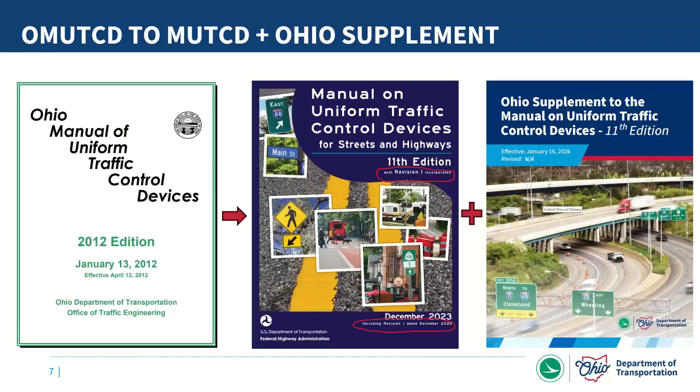Also want to make sure everyone is aware, recently the national manual had a revision that was released, just a little over a month ago, back in early March. With this new model, it's really important that users keep up to date on both our Ohio Supplement and the national MUTCD, since both documents are used together. As you have needs to check out things in our OMUTCD, just make sure you're pulling up the latest version of the national manual, and in this case, it's now revision 1.

So this slide, again, this is a review for folks who have been on the previous sessions, but I feel it's important to keep reiterating the different parts and what's covered, and how we broke this up for our training in these different LTAP sessions. Part 1 we covered in session 1, and that's the general foundational piece of the MUTCD document and our Ohio Supplement. It gets into a lot of the definitions and the legal authority and so forth.

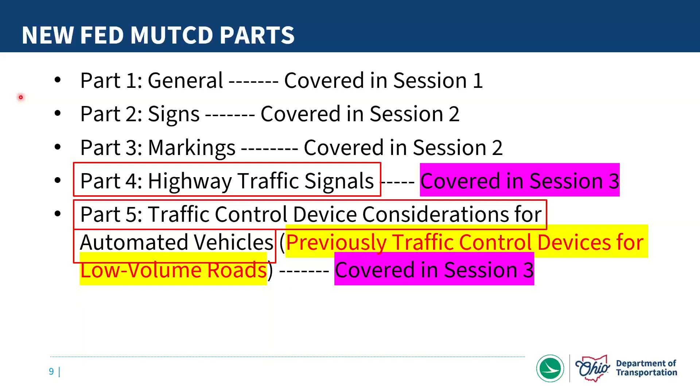Moving on, part 6 of the manual gets into temporary traffic control devices, and we've got a session that's going to solely cover that part - that's our next session, coming up in a couple weeks. Part 7 gets into traffic controls for school areas, and part 7 along with part 9 is going to be covered in our 5th session. Part 9 gets into bicycle facilities. As far as today's session, we're also going to be covering traffic control related to railroad and light rail grade crossings. So that's an overview of what we're getting into today, and a look back and look ahead at what our sessions are going to cover.

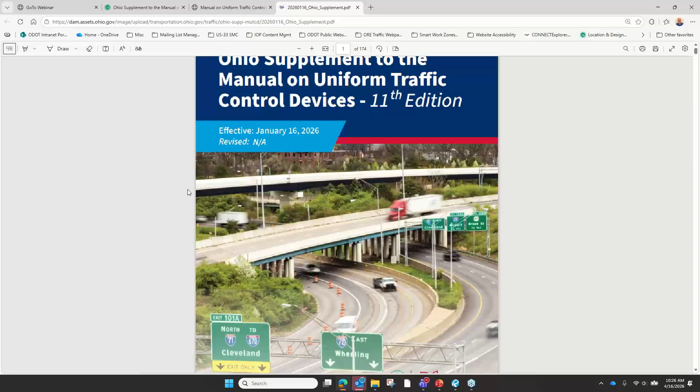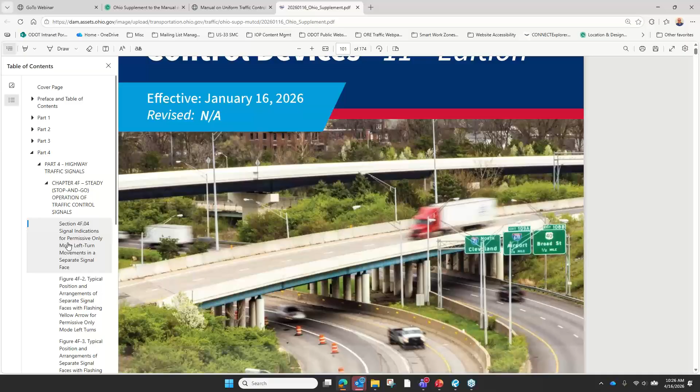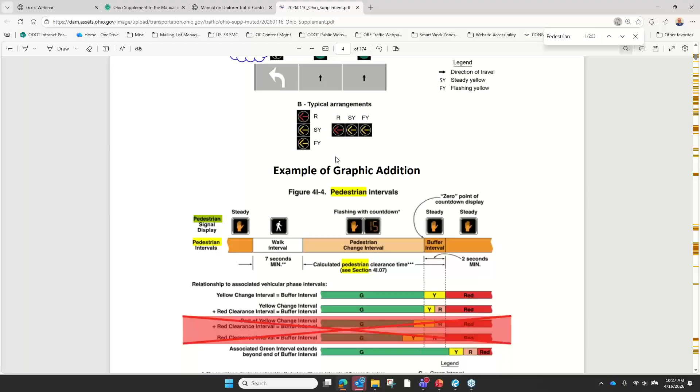Just to zoom in a little bit here, but again, to emphasize, all the information is bookmarked. You can just expand that and jump to a particular section, say in section 4, everything's bookmarked. Also, if you do the search feature, Control F, I'm in the browser, but if you download it to Acrobat or another PDF reader, Control F seems to be pretty universal, but check your particular software for the search features. You can type in search terms, so I plugged in 'pedestrian' there, and the reason I wanted to do that is to illustrate how we specifically set this up so that the text within the different graphics would also be searchable.

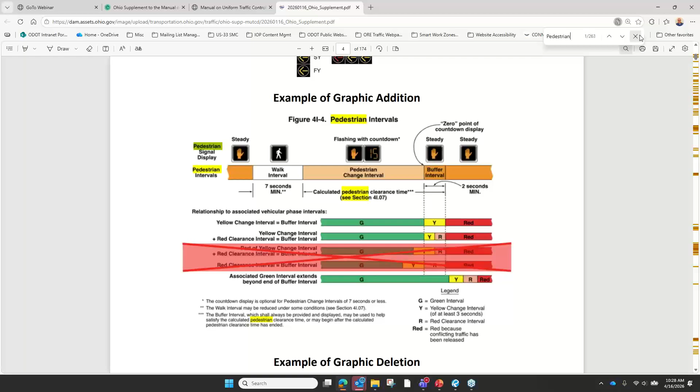If you look at the same graphic in the national MUTCD, unfortunately, if you search for pedestrian, a lot of the text indicating pedestrian isn't searchable as of yet. That's some feedback we've provided to our colleagues at FHWA, but hopefully that will be updated in the future on the national side. But at least on the Ohio Supplement, we've added that in so you should be able to search for and get hits both within the text content and the figures. I just wanted to point that out as well.

Before we jump into the main content for this session, I wanted to do a quick review, going back into part 1, to talk about compliance of devices. This is a really important topic because the MUTCD lays out a handful of traffic control devices that have specific timeframes tied to them, but the vast majority of updates and changes to traffic control devices are not tied to any specific compliance date. So I wanted to bring up this.

FHWA has set up a MUTCD FAQ page that has some frequently asked questions, and one of them gets into this: if there is no compliance date for a new requirement, when do those devices have to be upgraded to meet the requirements? What I highlighted here on the slide, I'll paraphrase, is basically that any traffic control devices may stay out in the field throughout their serviceable life. They would just need to be replaced or updated when you were at the end of the serviceable life, or if you had a project going through there, or other scheduled maintenance — that would be the timeframe you'd have to go replace traffic control devices that are not specifically listed as a target compliance requirement. Here's a hyperlink that takes you to that particular FAQ page. There are several other question answers in there that have some pretty good information for folks as well, so I definitely encourage you to check those out.

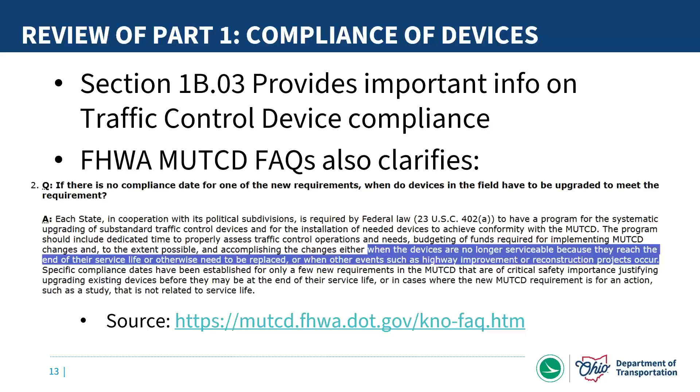So you've got weight limit signs for your structures. We talked about that in session 2. Also in session 2, we talked about low clearance signage for structures. There's a couple items here related to that. We also talked about maintaining that minimum retroreflectivity with our pavement markings. And then in our session today, there's a couple of target compliance dates associated with some of the rail grade items in the MUTCD. So we're going to take a little deeper dive on those today.

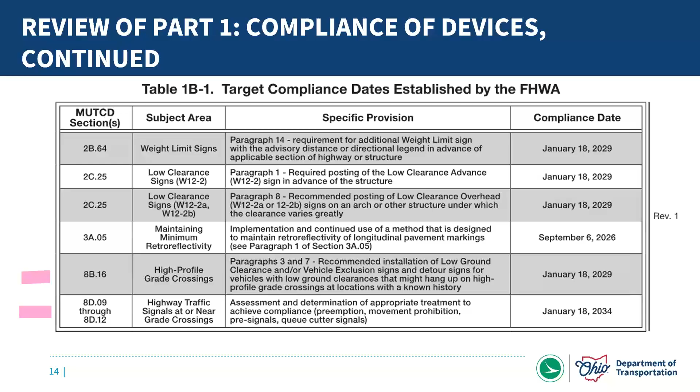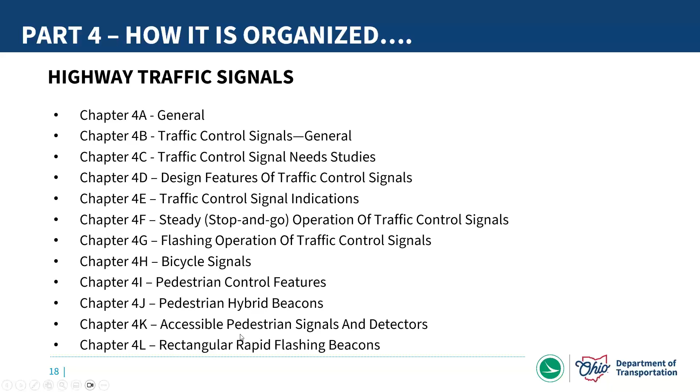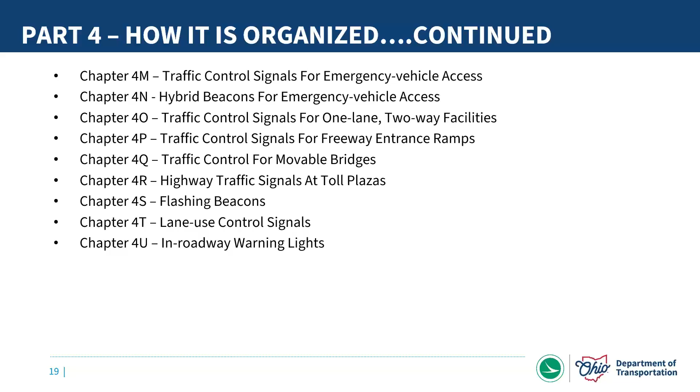The next slide is just a continuation, because part 4 does have quite a few chapters, getting into all the different aspects of highway traffic signals. So just a quick look at the additional chapters that make up part 4.

To change things up a little bit from the previous sessions, in part 4 here, what we did with the slides is we wanted to emphasize all of the things that were within our Ohio Supplement. So we're going to take a look at the specific things in our Ohio Supplement first, and then we've got some slides later on that touch on some of the changes between old and new that maybe aren't necessarily within our Ohio Supplement document, but are important also to be aware of.

So the first section wanted to mention here is sections 4F.04 and 4F.08. This gets into our flashing arrow sign use. Our Ohio Supplement, and this is something we had in the previous manual related to our flashing yellow, had some information about the installation of these signs when these types of signal installations are happening. So this is not new from the previous manual, but it is something we added again with our Ohio Supplement just to make sure there was emphasis on the addition of these signs.

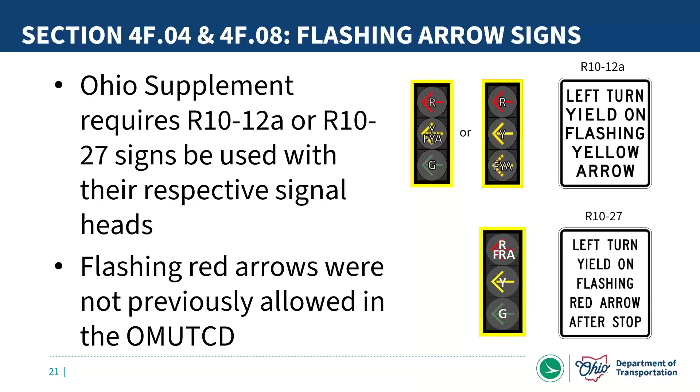Moving on, another section that is in the Ohio Supplement is 4F19, which gets into pedestrian timing during preemption. What we did in the Ohio Supplement: there was an optional statement in the national manual that allowed the shortening or omission of the pedestrian change interval. We elected to eliminate that option in our Ohio Supplement. We felt it was important to maintain that time period for the pedestrian crossing before the signal went into preemption. So that is a change we have made with our Ohio Supplement as well.

Moving on, another section in our Ohio Supplement is 4I06, which gets into pedestrian intervals and signal phases. What we ended up doing here, this graphic does a pretty good job of illustrating it, and this is not a change from our previous OMUTCD. Our previous OMUTCD had eliminated these two options within this figure, but with the previous OMUTCD you just did not see any of this information. One thing that has been helpful with how we set up this new Ohio Supplement is that we felt it was important, even if we were deleting content from the national manual, to make sure it was clear it was still shown, so folks could see what was within the national manual. But again, we did away with these two instances where you have the flashing hand during that yellow. So we did away with both of these instances here.

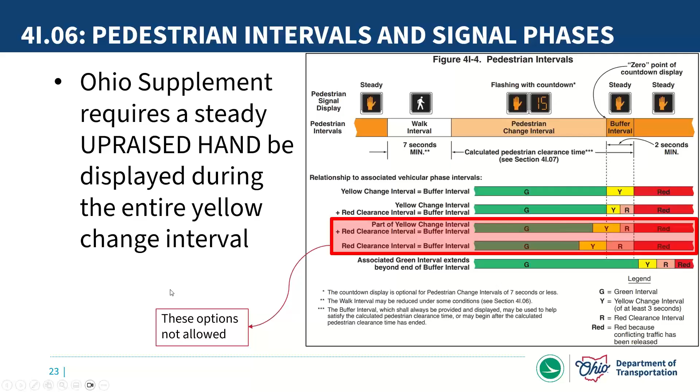So going to transition from that. We didn't have a huge number of sections that were within the Ohio Supplement, so we're going to transition over to look at some other significant changes that are in Part 4. We'll jump into that now.

First off, in Chapter 4C, that gets into the different warrants, the studies associated with justifying signal use. One thing we wanted to point out here is with the new manual, with warrants 1 through 3, they now specifically mention this use of the more critical minor street volume. So that's a change from the previous manual. And the other thing to point out is that it's possible that either of the minor street directions could satisfy these warrants. So that's something to keep in mind as you're evaluating these warrants—there has been a change here.

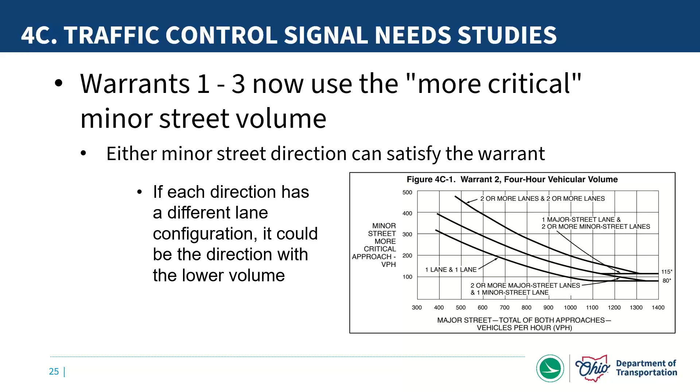Also, continuing looking at the signal needs studies or the warrants associated with these, Warrant 4 gets into pedestrian volume. There was an addition in the new manual that gets at whether your crossing has a median that is sufficient to provide space for protection of pedestrians. Previously there wasn't any information related to that. So this warrant has changed some within the new manual.

And similarly with the school crossing warrant for signals, it's now a requirement—if you're meeting the requirements associated with this Warrant 5—that you need to have pedestrian signal heads. That's now a requirement, whereas before that was not.

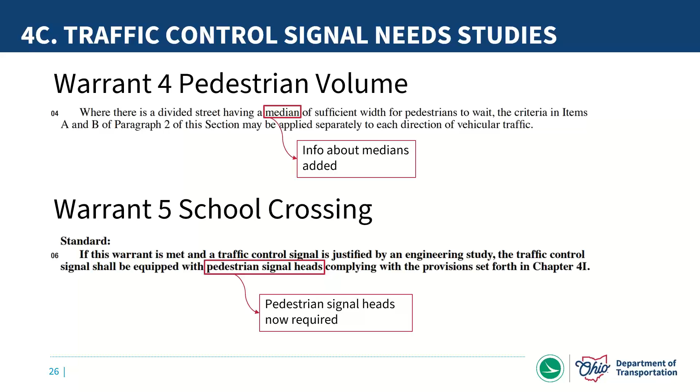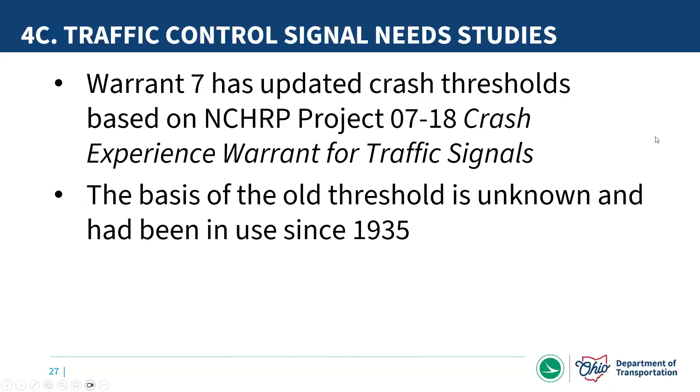Continuing on with Chapter 4C, Warrant 7 has included some updated crash thresholds. This is based off of the NCHRP project 7-18 crash experience warrant for traffic signals. So that information from that research project has been incorporated, which is a good thing. The previous information had been around for a long time, so there are some changes associated there, and we'll take a little closer look at that.

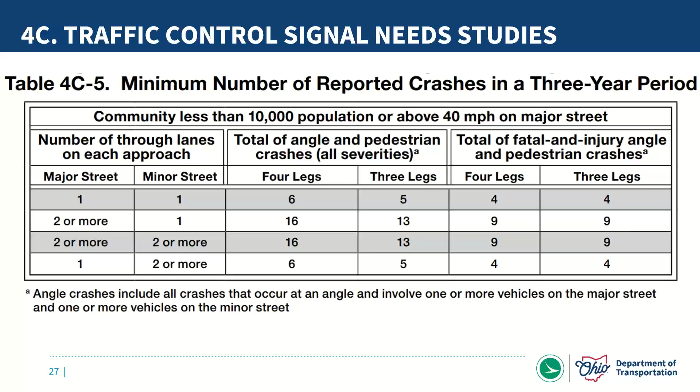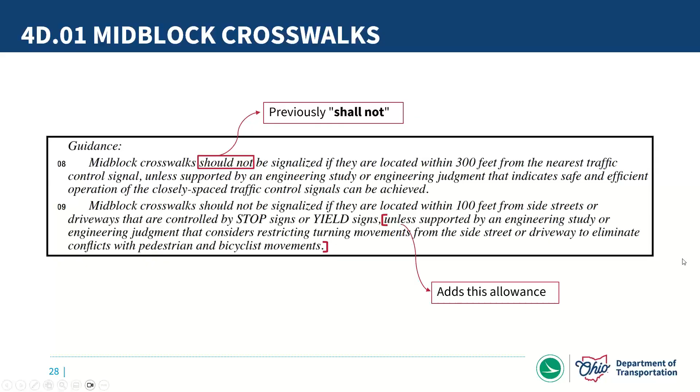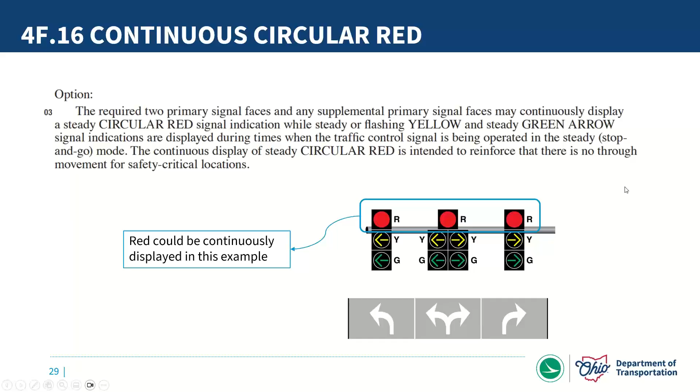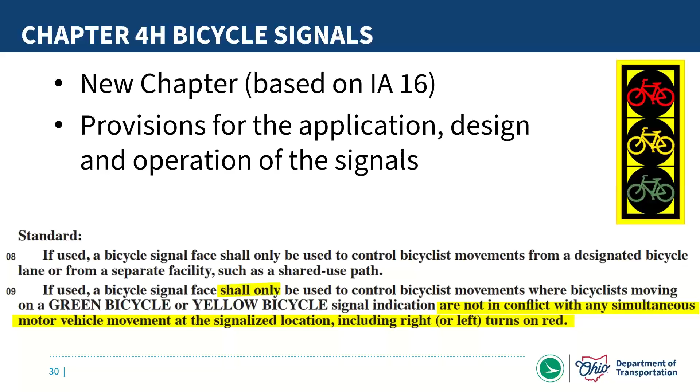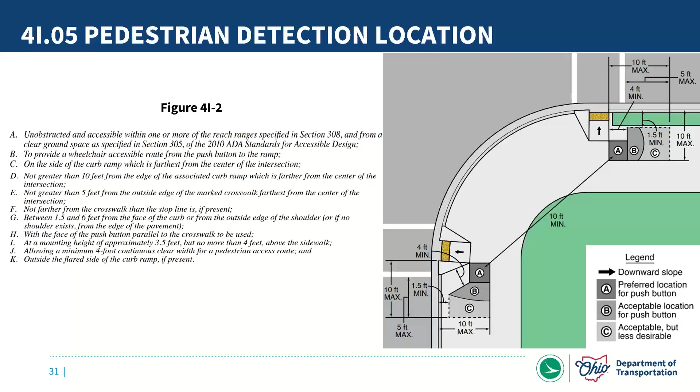Obviously you get into a lot of urban situations and you have to make some adjustments because of other conflicts. So this does a pretty good job of giving you some good information to go off of there. This is a change in the new manual - it basically consolidated a lot of previous information.

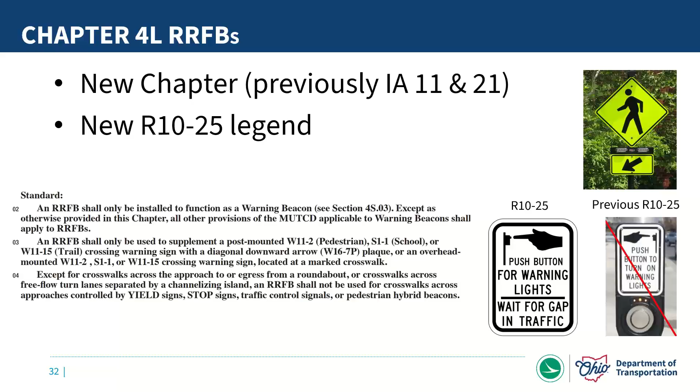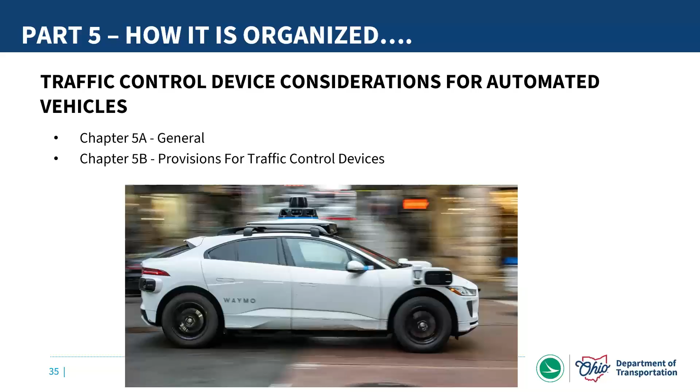Currently we do not have any Ohio specific language associated with part 5. But we will take a little closer look at a few of the sections that I just thought were key to be aware of.

So chapter 5, not a ton of information in this particular part, but I do want to take a quick look at some info related to section 5A03 and section 5A04.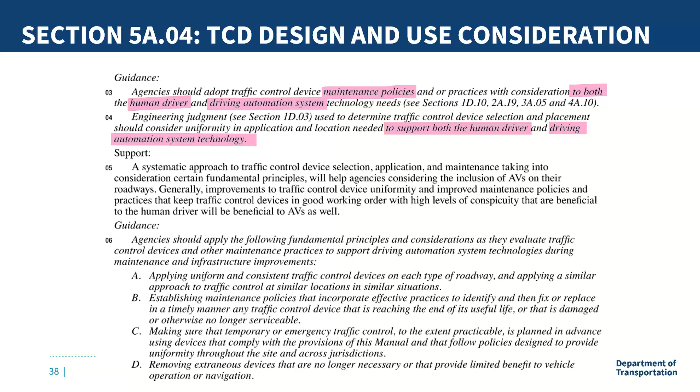Moving on, Chapter 5B gets into some more specific provisions. I'm going to hit on a few of these: we're going to look at 5B02, 03, and 04.

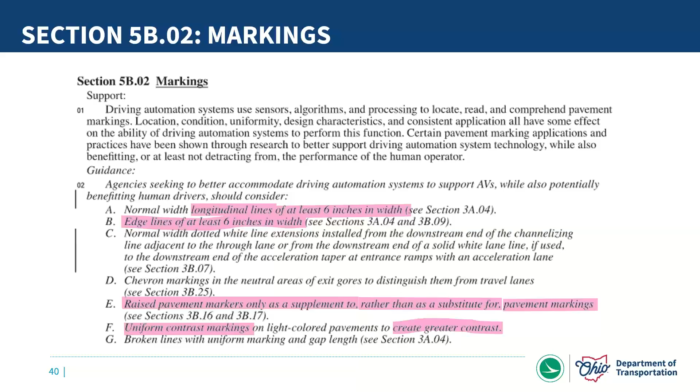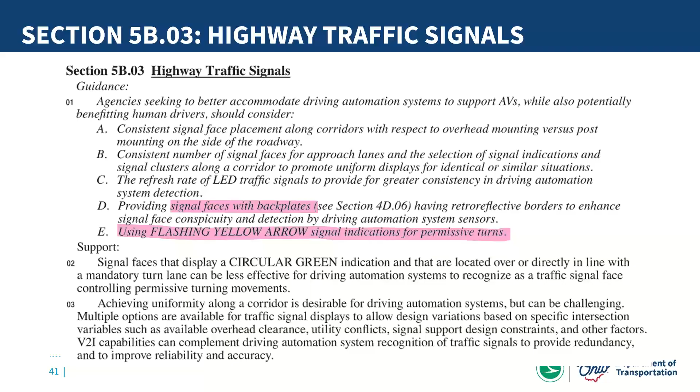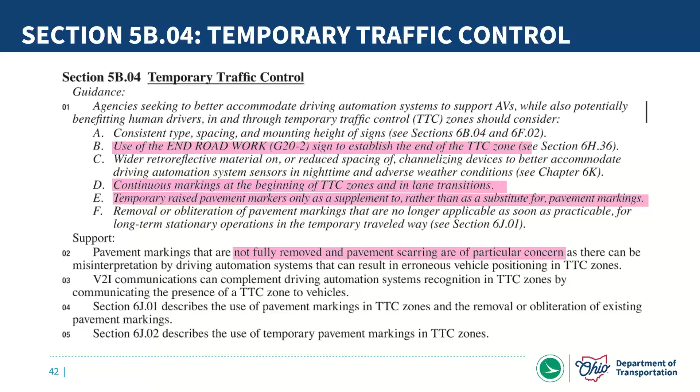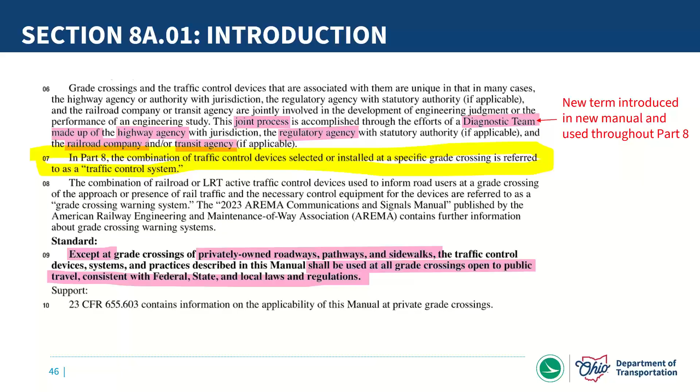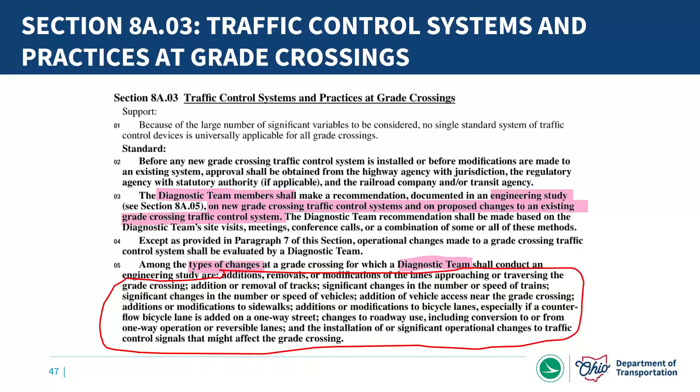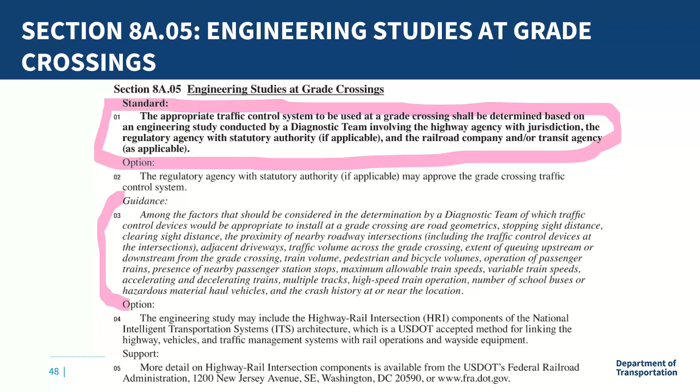And then down below here, this just gives some of the guidance on the different factors that the diagnostic team should be taking a look at. Again, I'm not going to read through all of that, but it's something important to be aware of if you are working on this type of project.

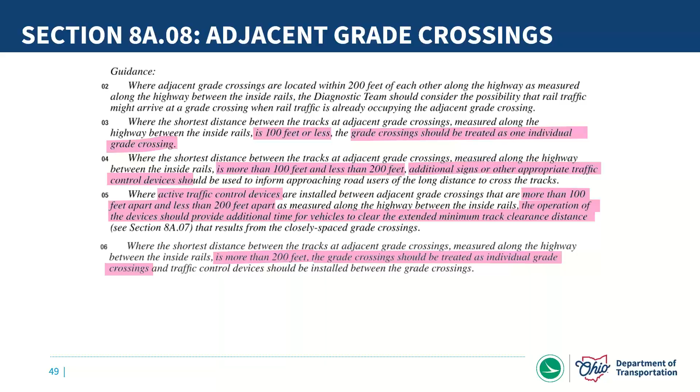This section gets into adjacent grade crossings, and I just highlighted, there's a lot of information in here, and it lists out some of the different distances and some of the criteria. So if you're 100 feet or less between grade crossings, you need to be treating that as one individual grade crossing. And then it goes through some of the different scenarios and how those should be treated. So this is some good information here. It's guidance information, but some very good info if you are working on traffic controls for a rail grade crossing.

And then finally here with section 8A12, this talks about circular intersections or your roundabout type projects, and it has a standard requirement here, which I've highlighted part of. Paragraph 2 gives a defined distance: if you've got a roundabout or circular type intersection within 200 feet of a grade crossing, you are required to have an engineering study, again with the diagnostic team looking at the impacts of that circular intersection and how it impacts, if there is potential queuing and how that might impact the grade crossing.

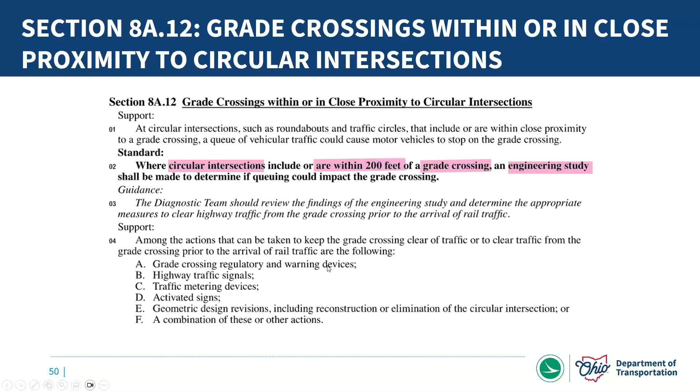So moving on into Chapter 8B. We've got one slide I'm going to hit on here, Section 8B04. That section is actually in the Ohio Supplement, and then there's a couple others here I'm going to look at, one of which is covered as far as a target compliance date. So I want to make sure we take a look at that as well, 8B16. So we're going to jump in here with 8B04.

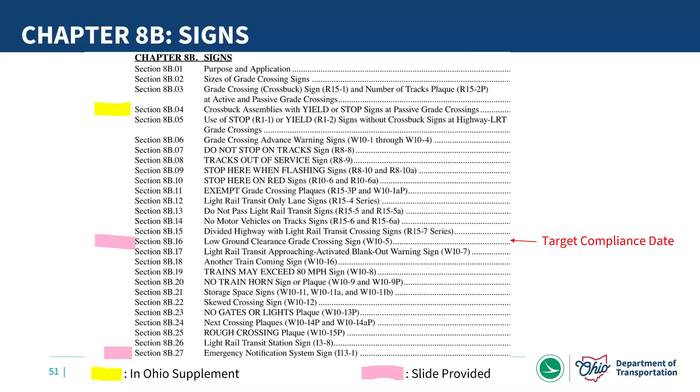Again, this section is in the Ohio Supplement. This section talks about the treatment of a passive grade crossing, so whether you're using a yield or a stop sign. What we ended up adding here with our Ohio Supplement, and it's kind of important to point out, is that our Ohio Revised Code has some specific information about the signage at rail grade crossings, so we wanted to make sure that users refer to that.

And then also, if you are replacing existing signage, there is a database out there that has the existing information available, and if you're not changing the characteristics of that crossing, you need to be using that database and replacing that sign with the same sign that was there. If you are making changes, then we're referring you to the Ohio Revised Code section, and also our TEM has some additional guidance on determining the appropriate signage for that particular crossing.

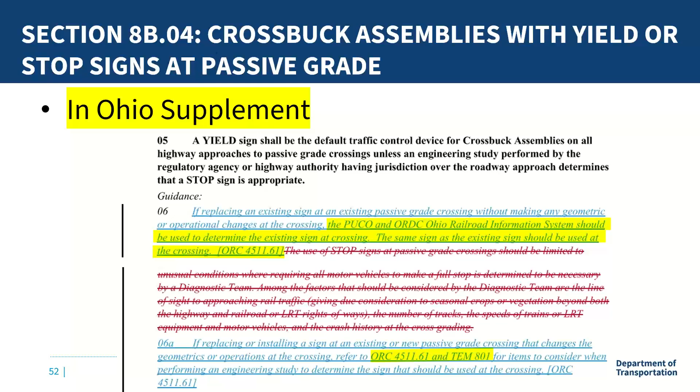So this is a pretty important one. If you are making any changes to a rail grade crossing, you need to make sure that you're taking this into account, and that a yield - the MUTCD default is a yield sign - but with how Ohio law is structured, there's a lot of consideration given to stop signs. So that is why we wanted to refer users to this additional information, and working with our partners at the ORDC to come up with the appropriate signage.

Moving on here, I also wanted to touch on this. Again, this is still kind of tied to that Section 8B04. I just wanted to call your attention to the ORC section that gets into the signage at passive crossings. So, again, just referring you to this. If you have this type of project, you're definitely going to be wanting to pull up all of these different resources.

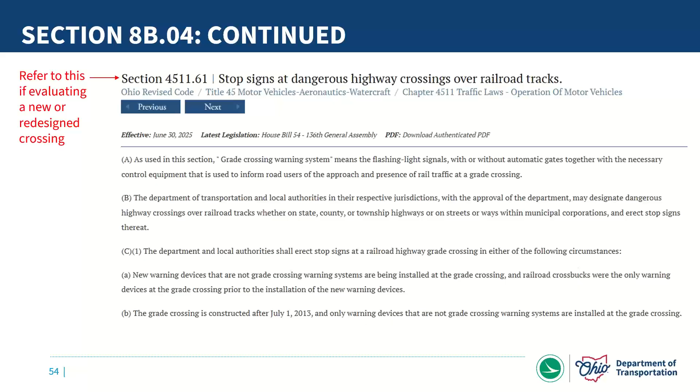Moving on to Section 8B16. So this one is covered in the target compliance date requirements, so we're going to take a little closer look at this one. And again, the target compliance date for this is January 18th of 2029. So we're talking 3 years from now.

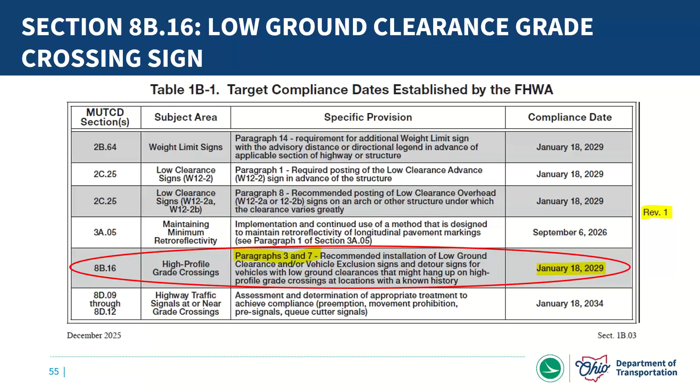And we're going to take a little closer look here. So what this section gets into, particularly the 2 paragraphs mentioned there, is guidance information, but with this target compliance date, it definitely needs to be looked at. So what we're talking about is these low clearance type crossings where you've got pretty steep grades coming to your crossing. There's information about the appropriate signage to be used, and then also some information about providing detour information so that these types of vehicles have an alternate route that they can get around these types of crossings. And again, this compliance date is January 18th of 2029.

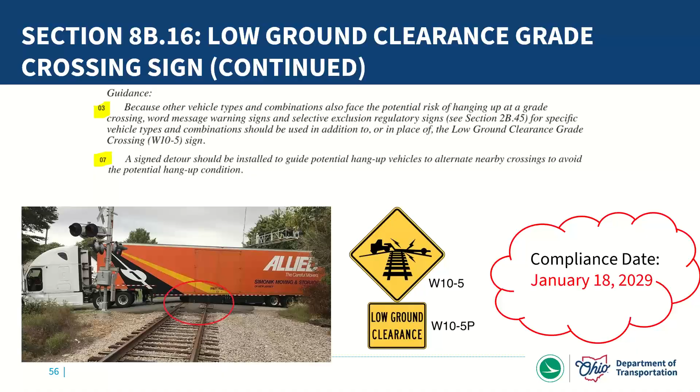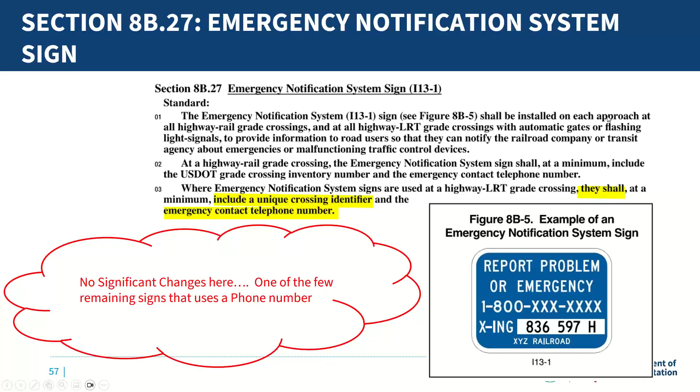Looking at Chapter 8C with markings, we've got one section in our Ohio Supplement, and I also wanted to hit on the last section, which gets into dynamic envelope marking and your do not block markings.

Moving on to Section 8C06, I wanted to illustrate your dynamic envelopes and do not block pavement markings. On the left-hand side here, these are your dynamic envelope markings, and the key thing to stress is that as a designer, or if you're prepping plans or doing maintenance to mark these up, you need to be working with that particular rail company, because different rail companies have differing criteria as far as the width of the dynamic envelopes. You want to make sure that is incorporated when you're laying these out.

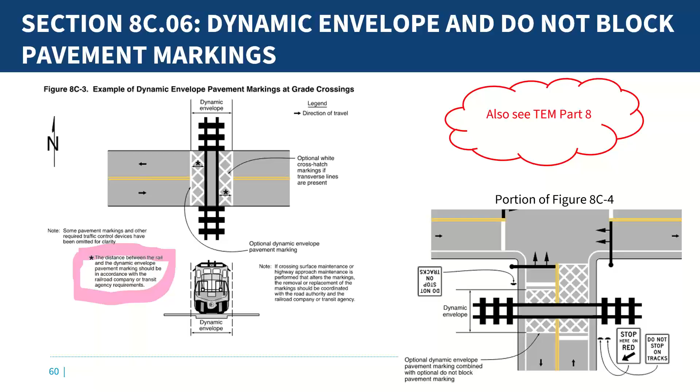Moving on to Chapter 8D, looking at your flashing light signals, automatic gates, and traffic control signals associated with rail grade crossings. We're going to take a look at several sections here, in particular 8D09 through 8D12, which are all part of a target compliance date requirement. Nothing in this particular chapter is Ohio Supplement, but there are a few things I definitely want to hit on here.

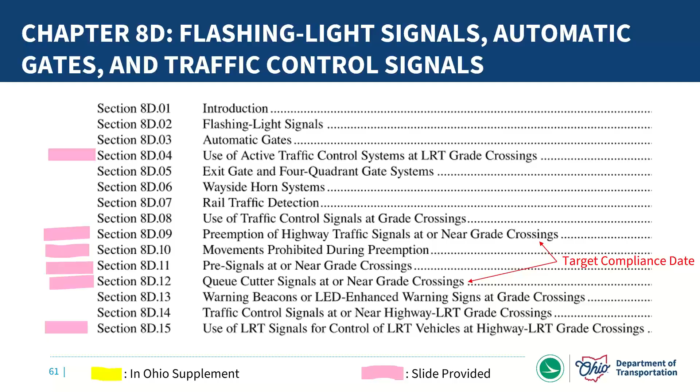First off, in 8D04, I wanted to point out this particular change. Previously, this language was a little different, with some guidance statements worded differently. Now this has changed over.

So if you're talking light rail crossings, there's some speed criteria with the actual light rail system as to when that triggers active traffic controls. And if you get above a certain threshold, that triggers the active traffic controls to include actual gates for that particular crossing. We don't have a ton of light rail systems throughout the state, but if you're in the Cleveland area or another part of the state that has a light rail system, this is just something to be aware of, that this has changed.

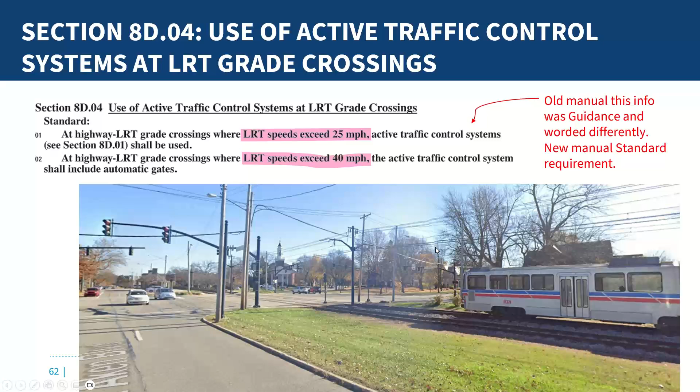Now moving into the sections that are part of the target compliance date, looking at the target compliance table, this gets into preemption, movement prohibition, queue cutter signals, pre-signals, that type of thing. The intent here is to be evaluating those types of crossings and making sure you're in compliance, or coming up with a plan to achieve compliance.

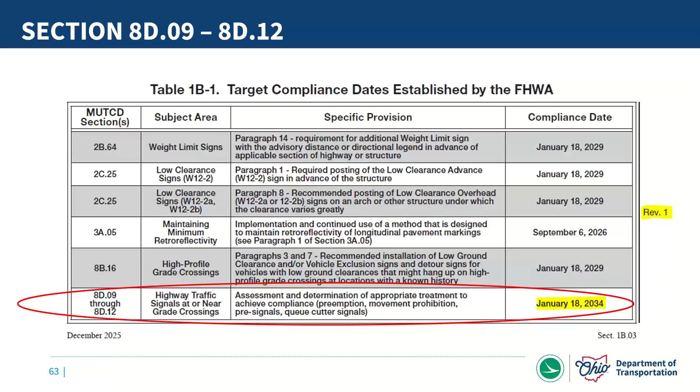The types of things we're looking at - I pulled this example, I believe, from up in Marion County, where you've got a traffic signal in close proximity to actually two rail grade crossings. In those types of situations, if the signals are interconnected with the grade crossing traffic controls, there's some different information within these sections that you definitely want to take a look at, and that is the intent of this target compliance requirement.

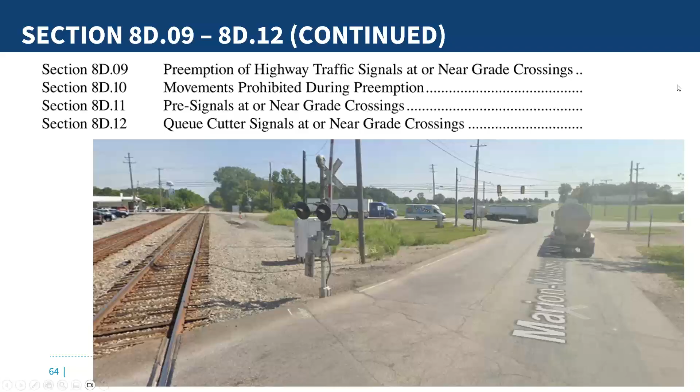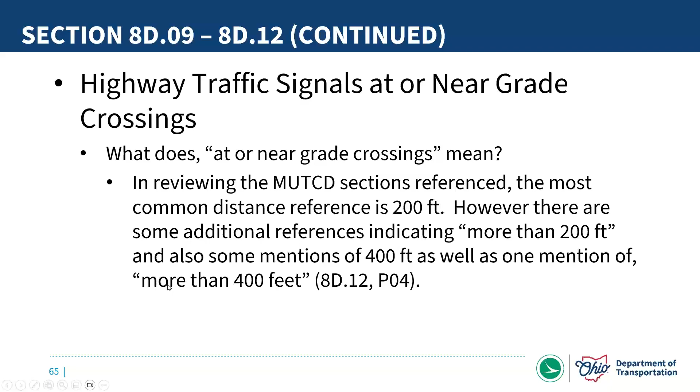This slide, I just wanted to hit on what does an at or near grade crossing mean. I kind of gleaned through part 8 and pulled in some different information, but in general, the most common distance being referenced is 200 feet. There are a few occurrences where they're talking about more than 200 feet, and even a mention of 400 feet. So unfortunately it's not a black and white definition.

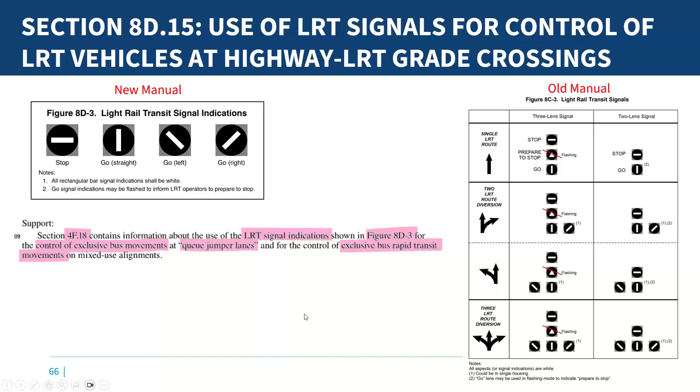We don't have a ton of light rail throughout the state, but it's important to mention that these types of signals are not only to be used on light rail type systems, but there's also a reference back to part 4 tying their use to bus rapid transit type movements. I know there are a few of those types of projects being looked at, and I think there's one already in service up in the Cleveland area. So if you have signal projects updating those signals, or a bus rapid transit project in the works, pay attention to this and make sure that triangular shaped signal indication has gone away with the new manual. Just make sure to incorporate that.

This is just a picture of that, actually up in the Cleveland area, an existing situation. This isn't a great photo, but it does show the 3 signal heads, the middle one being the triangular shape. Again, this is not a compliance type issue, so these can remain through their service life. But if someone up in the Cleveland area works on a project to update the signalization for this corridor, you'd want to take that into consideration to get rid of that triangular signal, with an upcoming project or once the service life ends or they start to malfunction.

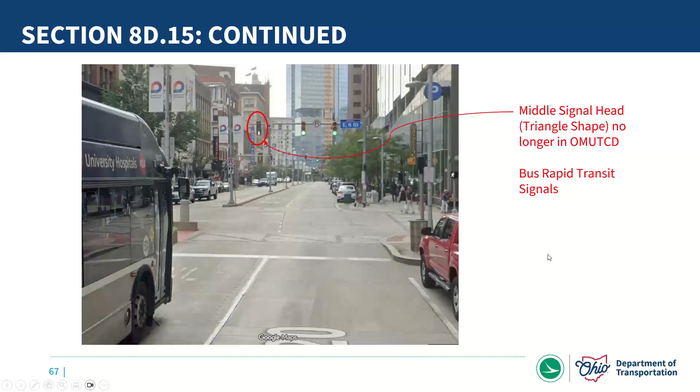Moving on, real quick, I'm going to take a look at Chapter 8. I didn't prepare any particular slide for this, but just wanted to show you the makeup of Chapter 8E. This gets into your pathways, so bicycle interaction, pedestrian interaction with rail grade crossings, and the appropriate type of traffic controls to be using for those applications. Some of this will also tie in to information we're working on, which we'll present when we get into session 5 of our series, covering pedestrian and bicycle considerations as well.

Those are the items you would need to work with the railroad, and Bobby is a great liaison for giving guidance on if railroad coordination is needed for your particular project. Signage, things like crossbucks, stop/yield signs right at the railroad crossing, are typically maintained by the railroad. Any advance warning, the W10 sign, circular sign with the R and R on it, those are typically maintained by the local highway authority, so they're typically far enough from the crossing that you wouldn't necessarily need direct railroad coordination or flagging to just replace those like for like.

Any kind of project that is restriping that changes the number of lanes, those are the types of projects where that diagnostic team really needs to be organized and meet and discuss the appropriate traffic control at the crossing, if any kind of traffic pattern is being changed temporarily or permanently.

Great, thank you. I'm glad we were able to hear you for that. Great answer. I have a follow-up question.

It says, does Jonathan's answer about the interim approval items mean that all existing RRFB signage should be updated immediately? Correct.